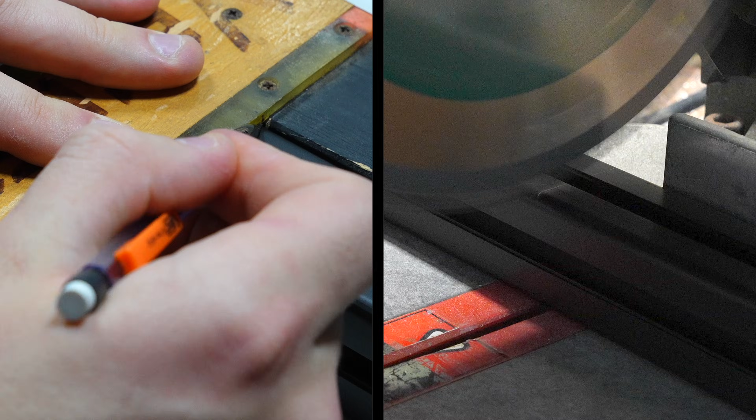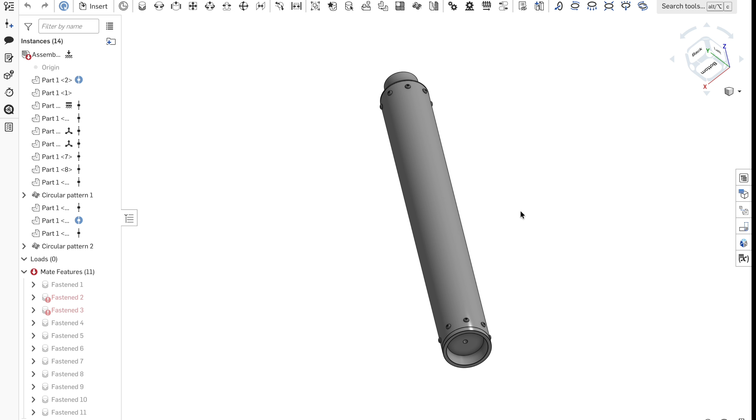If you're new here, for the past several months I've been designing and building my largest rocket motor yet, MEGAx. Designed to produce 500 pounds of thrust and a total impulse of 5,000 Newton seconds. This motor is no joke, over 2 feet long, 3.5 inches in diameter, and over 17 pounds fully loaded. Currently, the motor is fully designed, I've cast the propellant, and also built the blast chamber. This is where it will be fired in, but more about that later.

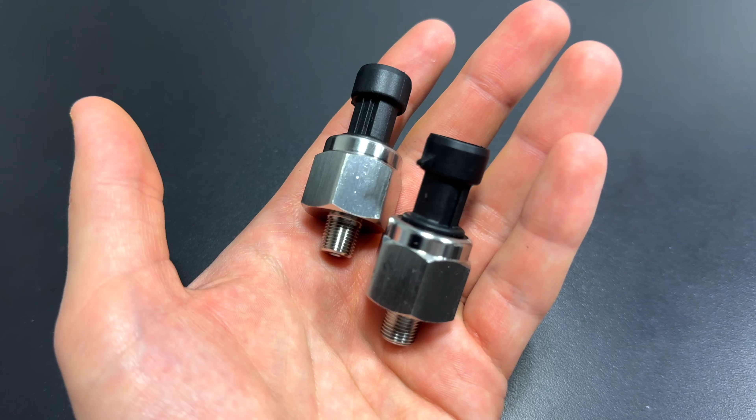With a motor this large, we need to make sure it stays put during its static fire. Otherwise, it really wouldn't be a static fire. That's where the test stand comes in. Its main job is to safely hold the motor in place while it fires, absorbing the thrust and forces it produces. The test stand also acts as a foundation for all the sensors. Things like a load cell to measure thrust, pressure transducers inside the chamber, and even temperature probes.

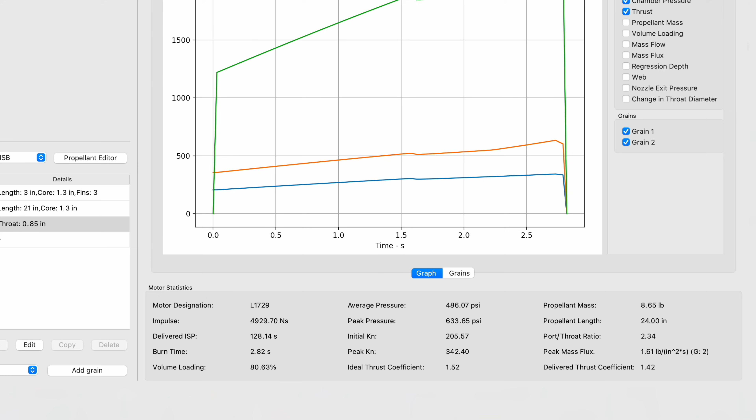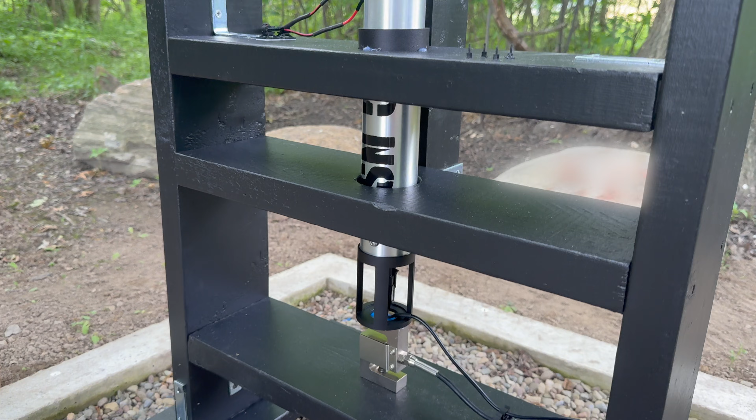And honestly, a static fire doesn't mean much if you don't get the data. All of this data helps you understand how the motor actually performs in the real world compared to your simulations. Whether the burn is stable, if the pressure stays within limits, and the nozzle and casing can handle the stress. It's the point where design meets reality, where all the calculations and simulations get put to the test. This is why data is so important.

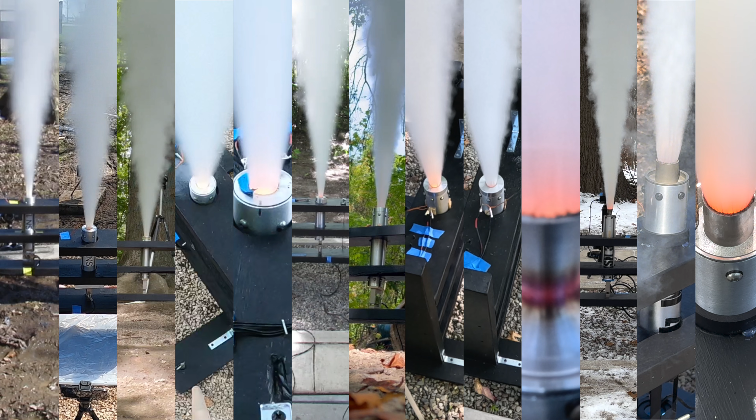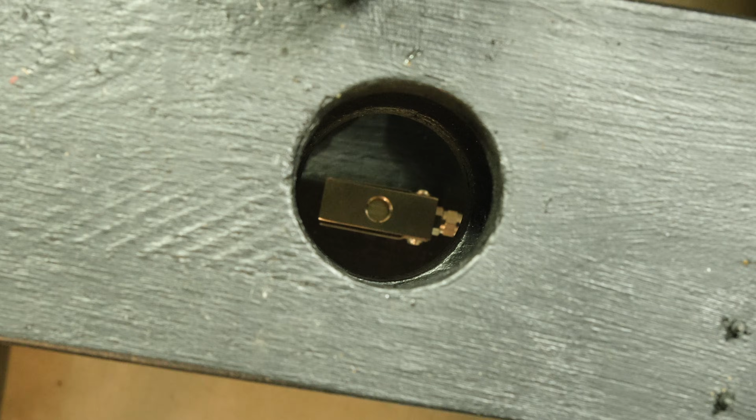Now that you know what a test stand does, let's take a look at the one that I built for the SN series and go over what worked and what didn't. This stand successfully fired 5 different motors with a total of 13 static fires. This test stand was pretty simple. I built it using a bunch of 2x6s. To get the motor to fit securely, I drilled a hole straight through 2 of the wooden pieces. Then I added 2 legs so it would sit firmly on the ground.

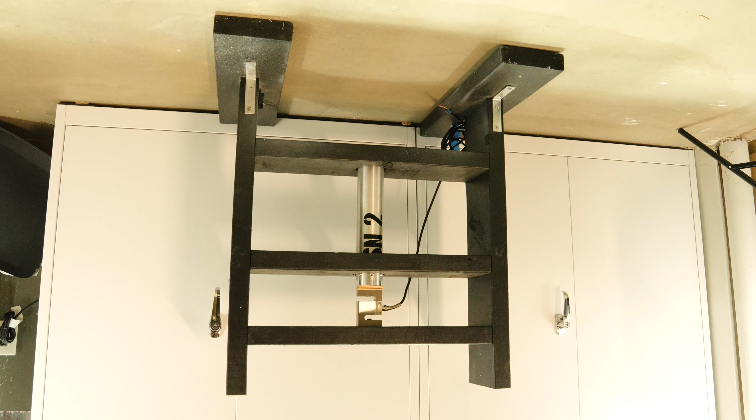After that, I inserted a bolt through the bottom. This allowed me to thread in a load cell and keep it locked in place. Other than wiring up the Arduino, that was basically my first full test stand. There was also another variant of this test stand used to fire SN2 in its flame trench. I won't go too much into it because it's basically just a flipped version of the original test stand.

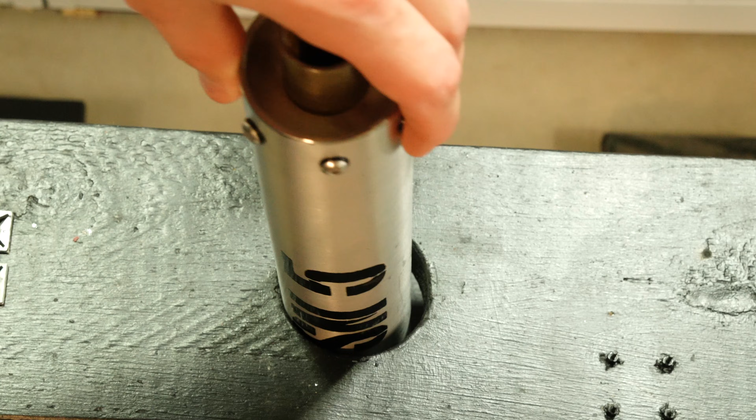Overall, this test stand was great. It was cheap, simple to build, and reliable. It was able to fit all 5 motors and never had any structural failures. There were a few downsides though. The biggest one was that the stand could only fit 1 motor size. Because the holes were directly drilled into the wood, there was no way to adjust for different motor diameters.

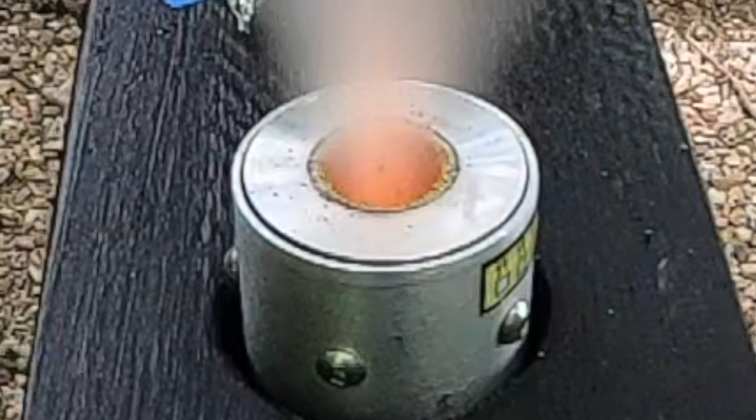Also, during the first static fire, there were some oscillations of the motor. This was because the hole was slightly oversized to let the motor slide in. That small gap allowed the motor to move around a bit during the firing, which is not good. To fix this, I used shims, and later made a plastic ring that held the motor tight.

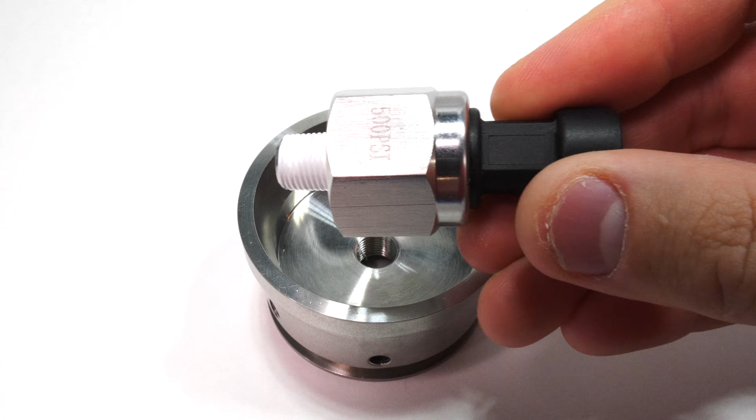I also made many modifications to this test stand over time. One of the biggest upgrades was for SN4. This was my first motor to use a pressure transducer. To make sure the pressure transducer didn't interfere with the load cell, I designed a load cell adapter. This allowed the motor and pressure transducer to interface firmly with the load cell without messing up the readings. Although this test stand worked great for the SN series, MEGAx requires a much more robust test stand.

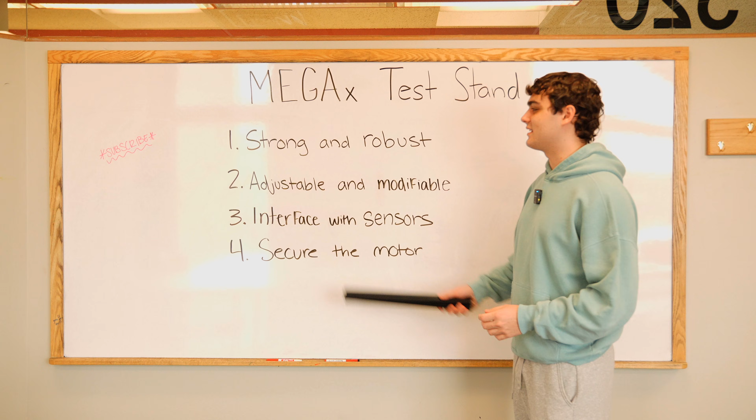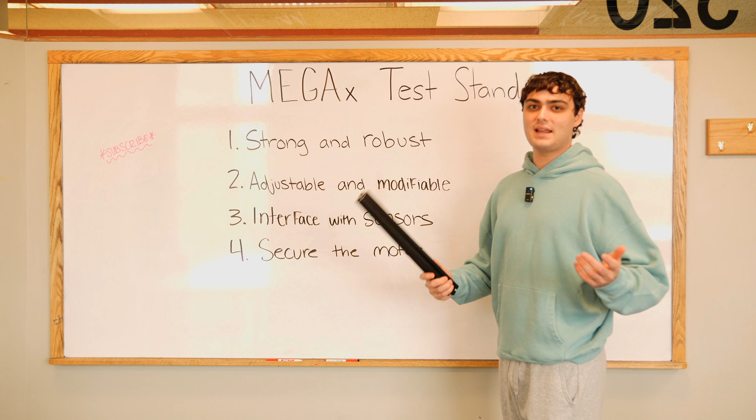Now let's take a look at how this test stand was designed. I need this test stand to do 4 main things. First, it must be strong and robust. MEGAx will produce around 500 pounds of thrust, even more in the future. Second, it must be adjustable and modifiable. If I ever want to add more sensors or make this test stand larger, I should be able to.

Third, it must interface with all the sensors. It should have proper mounting points for the Arduino, load cell, pressure transducers, and more. Fourth, it should secure the motor. This motor cannot move at all because that would not be good.

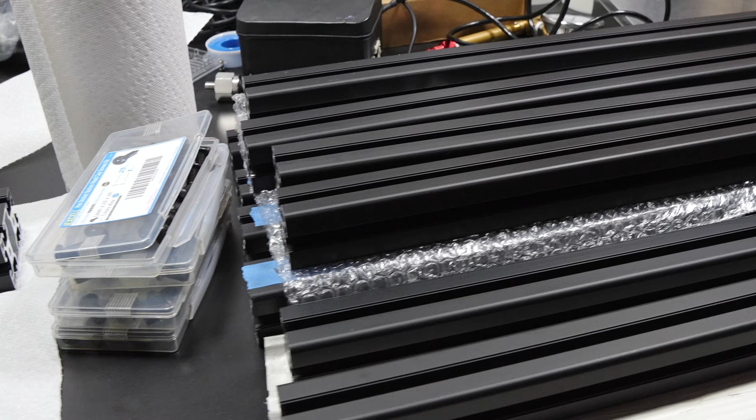To make this test stand strong, I'm using 4040 T-slot extrusion. This stuff is amazing. It's very easy to assemble, strong, and extremely reliable. T-slot comes in a bunch of different sizes, but I went with 4040 because it's not too small, but not too big. It's all put together with T-slot nuts, bolts, and 90-degree brackets.

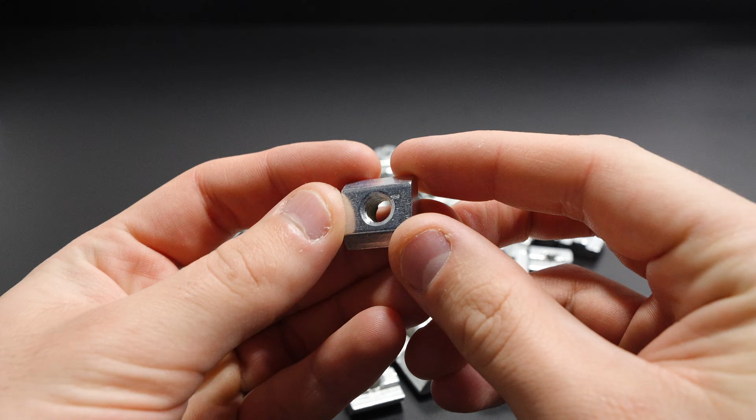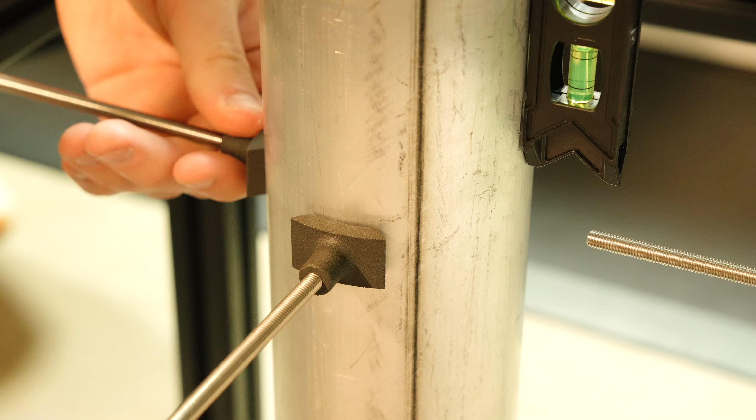This directly ties into adjustability and modifiability. T-slot is basically made for this. It's infinitely configurable. And most importantly, it needs to secure the motor in place. For that, I'm using an M6 threaded rod with a 3D printed end cap to clamp against the motor body. These clamps let me lock down the motor firmly while still supporting multiple different motor dimensions, something my last test stand couldn't do at all. Once we build this test stand, I'll get more into the data retrieval hardware and how everything interfaces.

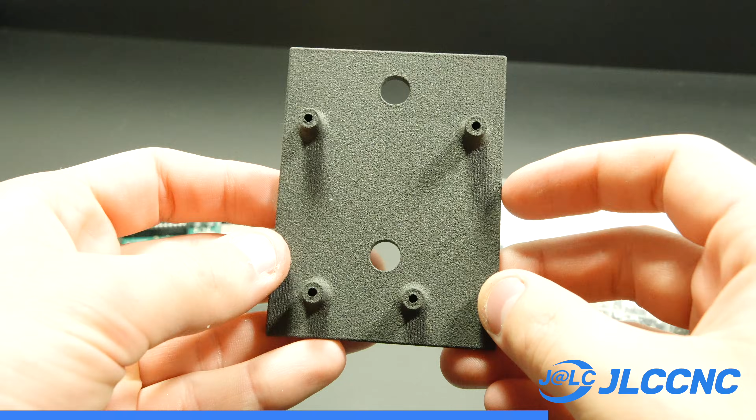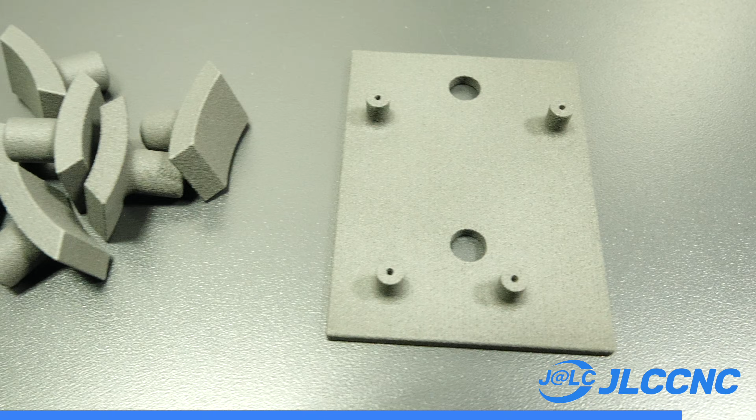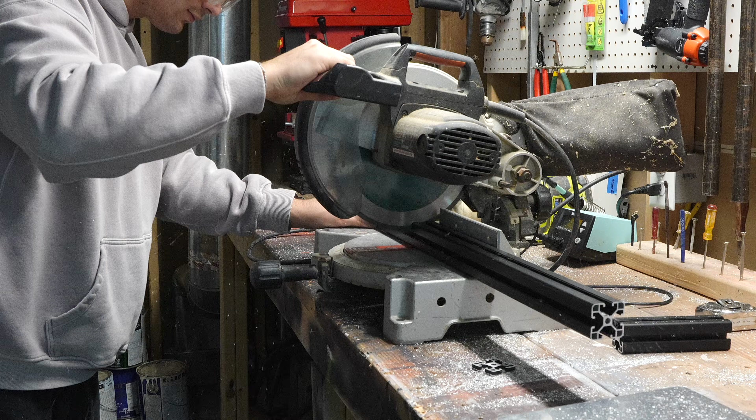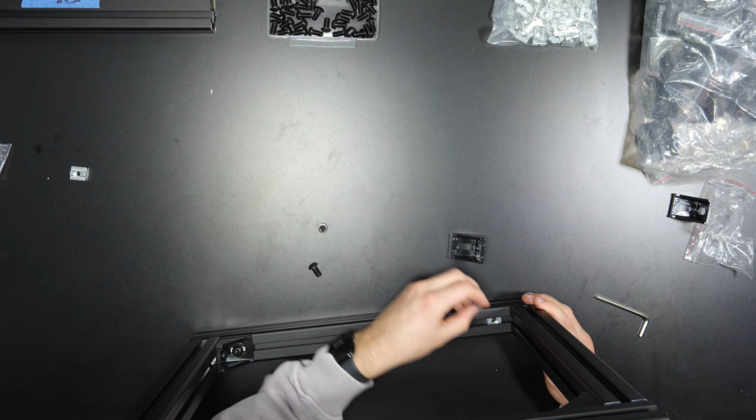The assembly of the stand was pretty straightforward. Some of the T-slot pieces came pre-cut to the exact size I needed, but a few I needed to cut down to size myself. After all the pieces were cut, I started by building the bottom section first. Working with the T-slot was a bit of a learning curve. I had to plan out exactly where each nut needed to go before tightening everything down, because once the two sections were fully assembled, it was impossible to slide any more nuts in.

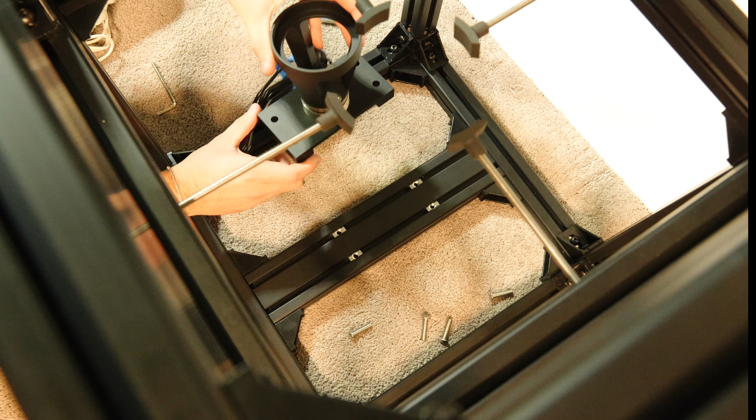I definitely learned this the hard way because I needed to take a few pieces apart to add in the nuts I forgot. I also added a few extra nuts in advance for some custom CNC parts I'm getting later, so I wouldn't need to disassemble everything again. Once the base was done, I installed 4 long vertical pieces on each corner. After that, I added the first level of horizontal T-slot to tie everything together and square it up. Then I built the top level, connected the whole structure together, and tightened everything down.

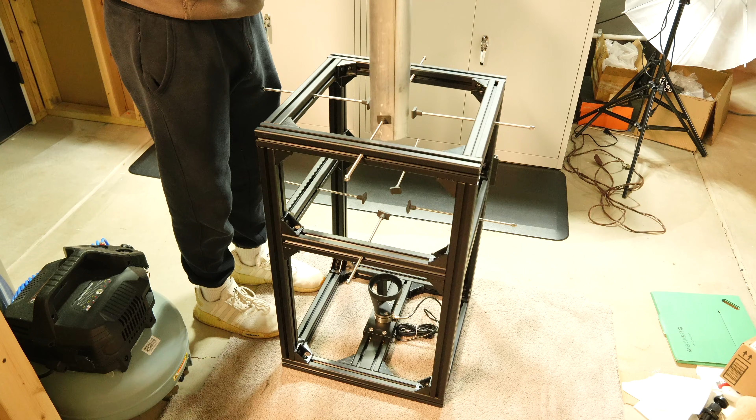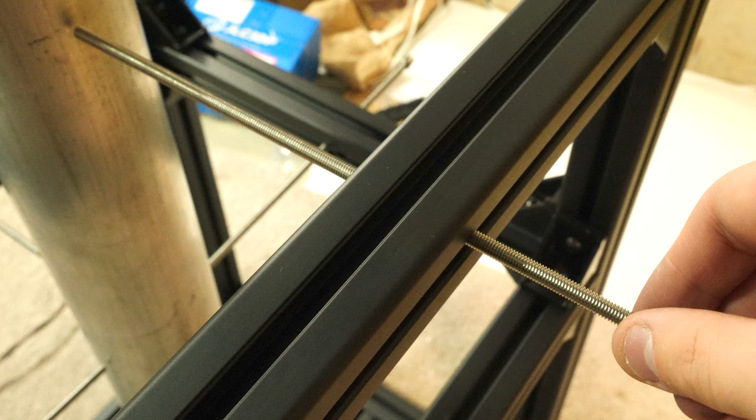To keep this motor from moving around inside the frame, I drilled and tapped 8 M6 holes around the second and third layer of the stand. Metal M6 rods will be threaded into these holes and clamped against the motor to lock it in place. I did a few tests because I actually wanted these rods to flex a little bit. There's no way to perfectly center these holes in the T-slot, and the motor itself will never sit perfectly centered either. That little movement allows the rods to naturally bend into position and line up perfectly against the motor sides.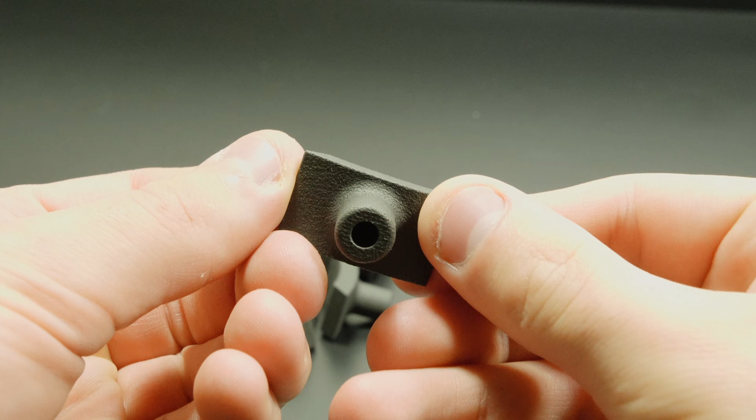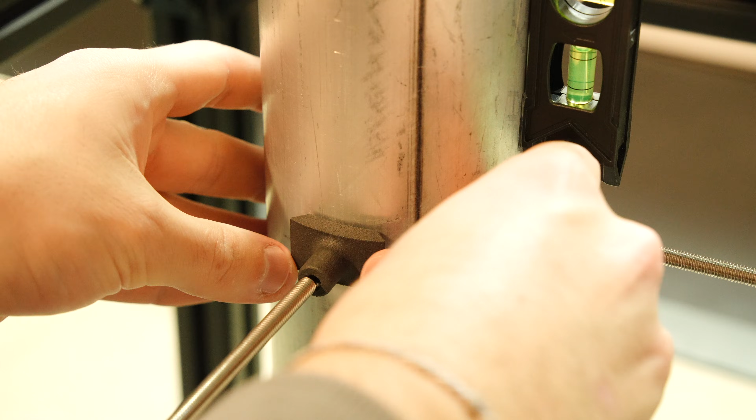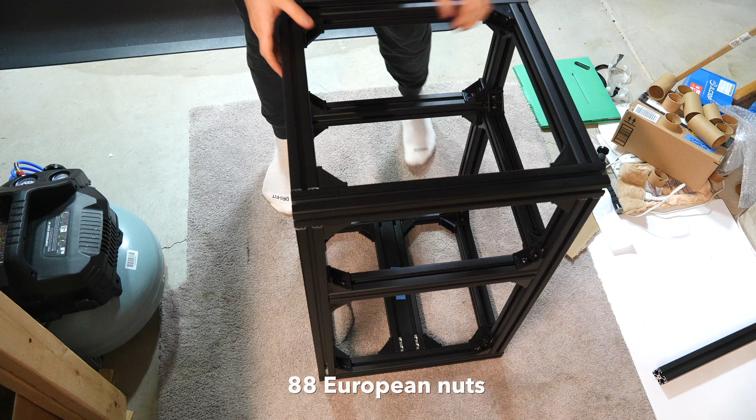On the ends of the rods, I'm using a 3D printed contour piece that perfectly matches the curvature of the motor. I tapped these prints so the rods can screw directly into them. To mount the motor to the test stand, I first add some double-sided tape to the printed parts. Then attach the print to the motor and thread the rod in. Overall, this frame used 27 feet of T-slot, 44 corner brackets, and 88 European nuts. Now that the frame is complete, we can move on and start adding all the electronics.

Now that the frame is complete, it's time to add in the load cell, pressure transducer, and Arduino. It's not as simple as just dropping these components in. They need proper hardware to mount them.

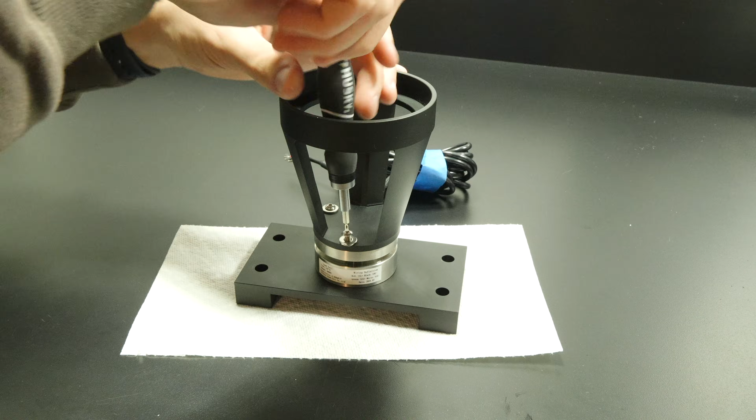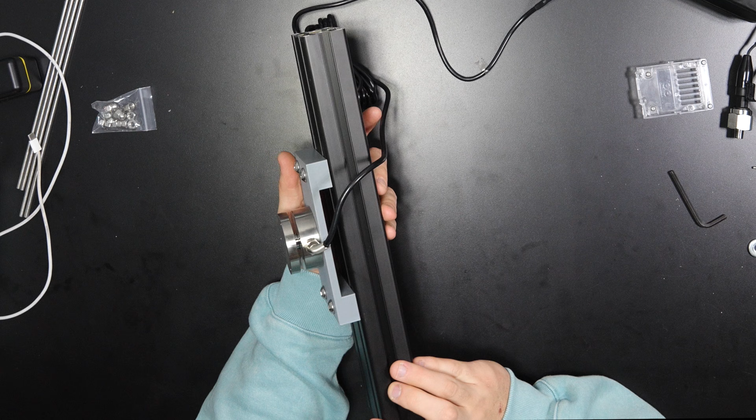Starting with the load cell, I need to custom design a plate so I can securely mount it to the base of the stand. After designing the part, I 3D printed it to make sure all the bolts would line up correctly. This part needs to be made from metal since all the forces of the rocket will go through it. I also ran a few load simulations on it, which was definitely overkill but fun.

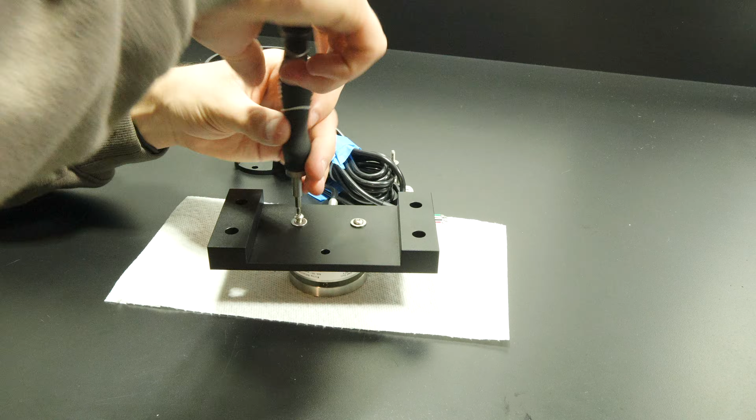I also need to design another part so the motor could attach to the load cell and leave room for the pressure transducer. I also simulated this part too. Once I received the parts, the assembly was straightforward. For the load cell, I'm using a 500 kilogram button style load cell. I like this form factor way more than the S-type I used on the SN series.

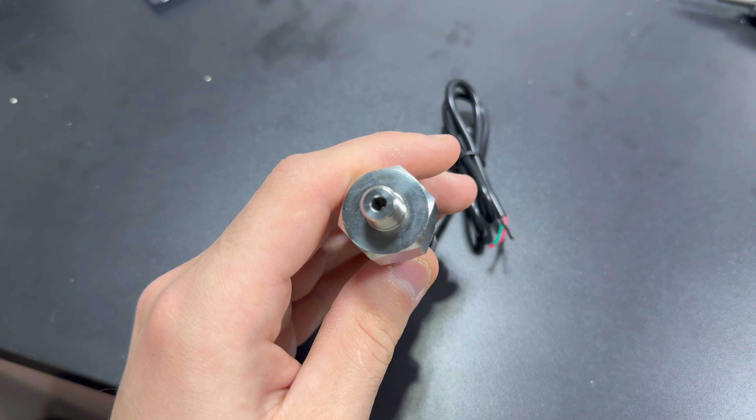For the pressure transducer, I'm using a 1600 PSI 1/8 inch NPT transducer. This is the exact same model I used for the SN series, just a higher pressure range rather than 500 PSI. Once those were added to the test stand, I mounted the Arduino and cleaned up the wiring. It looks a little messy, but I didn't want to cut any of the wires short in case I decided to move things around later.

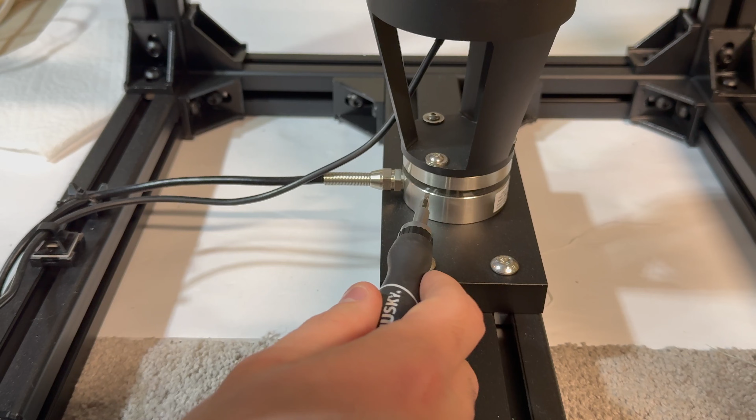The Arduino is running basically the same simple code I used for my SN series. The load cell is routed into an amplifier module where the Arduino reads it and logs it onto an SD card. The pressure transducer has its own built-in amplifier, so it just needs to send a 0 to 5 volt signal directly to the Arduino analog input, and that gets logged onto the SD card.

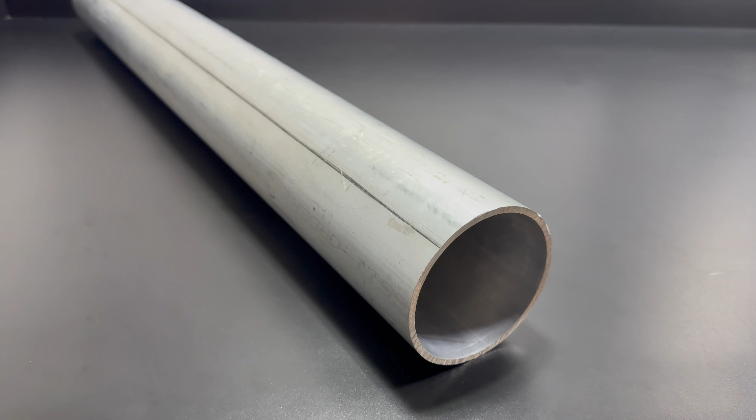I'm also adding 3 thermocouples to the setup so I can track the casing temperature and better understand the motor's reusability. Aluminum can lose its temper at high temperatures, and this greatly reduces the strength of it. I'll be placing these thermocouples at the top, middle, and bottom of this casing. This will give me some good data on how hot the casing gets, and then I can calculate how strong it is.

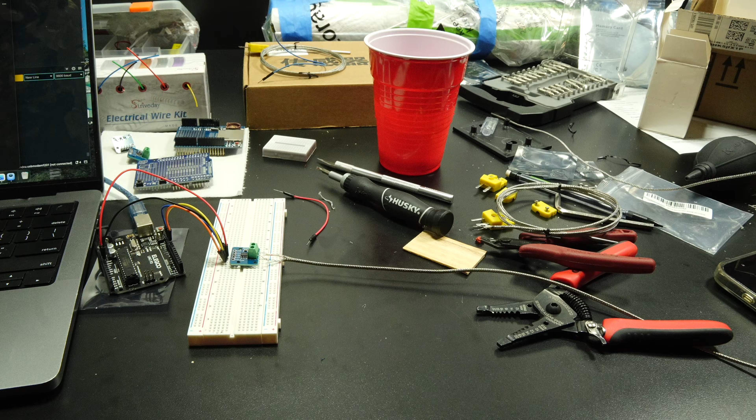As of recording this video, I've received all the components and am doing some preliminary tests. Calibrating the load cell and pressure transducer is very important. I calibrated the load cell with multiple known weights, and I calibrated the pressure transducer at different pressures using an air compressor and this apparatus I made. I'll also double check these calibrations right before the static fire.

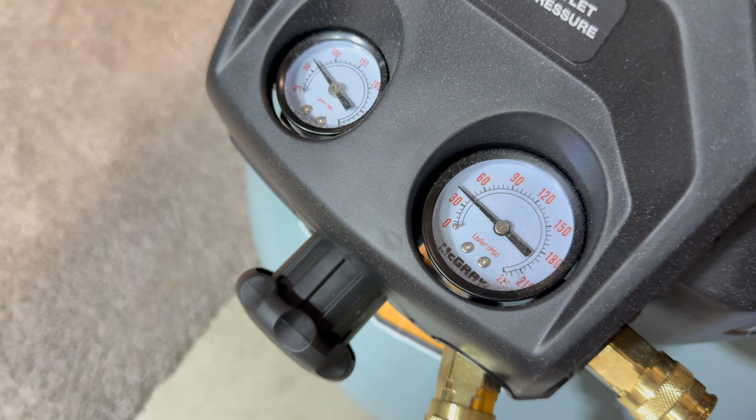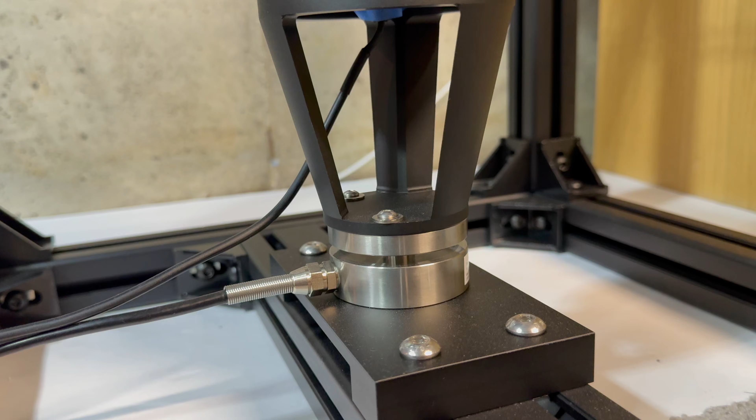Finally, once the casing was mounted to the stand, I ran a few load cell tests. I wanted to make sure the rods holding the motor weren't resisting the motor and preventing it from pushing down on the load cell even at low forces. And here's how the test stand looks, fully complete.

There is one more test I want to do. I want to see how this test stand fits in the blast chamber and if I'm still able to move around with it down there. It was a bit heavy, but still manageable to carry down. Once I was down there, it was a little tight, but definitely workable. I'll also need to drill and install metal rods in the concrete so I can bolt the test stand down, since you can see it's a little wobbly.

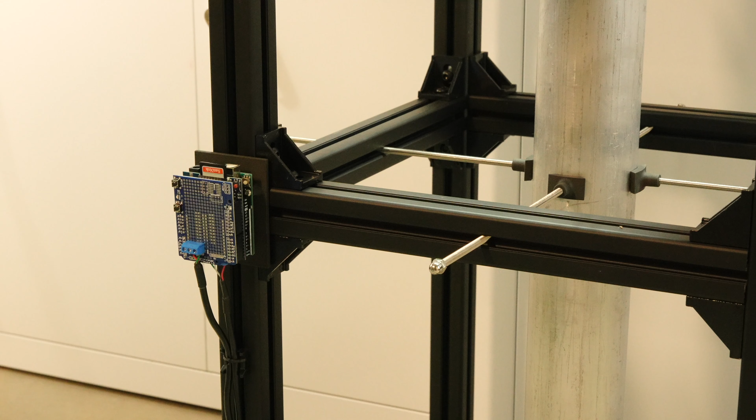I really hope you enjoyed this video. The last thing is to finish putting this rocket motor together and doing its static fire.